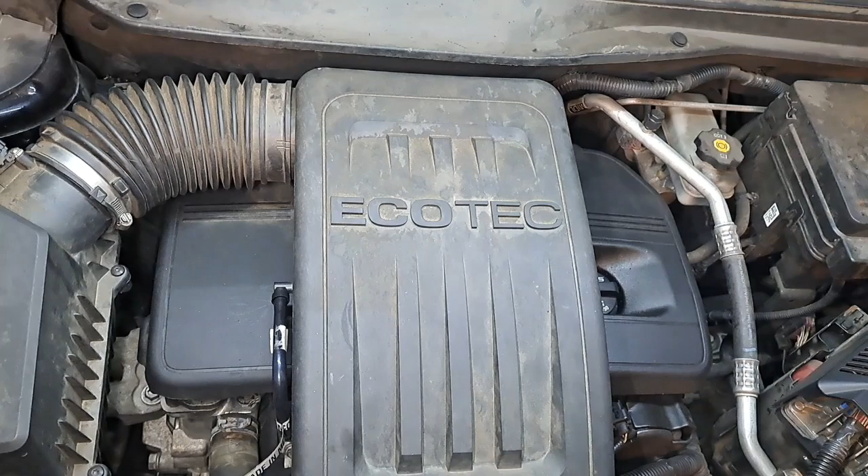All right, I don't want to talk too much on this because this is a warranty replacement. Well, you know how I am, I like to give good details. So, what's going on? This is the engine I did the head gasket on. It just had the burnt valve. It came back because the check engine light's on for P0014, and that's related to the exhaust actuator.

I replaced the oil control valve to see what happens, but pretty much what's going on, there's no movement, zero movement. And it wouldn't surprise me if what happened with this one, I think I reused the old gear, is going to be the same as what happened to the previous vehicle I just did with the timing chain components, which the actuator couldn't hold the preferred angle because the vanes inside of it were broken.

It was on the intake side, P0011. This is a P0014. So the vanes were broke, and it was incapable of sustaining 25 degrees. It would back out. That was just, for lack of a better word, interesting. It was interesting to find that. I pulled it apart and we saw that the vanes were broke. They're supposed to connect to the center portion or the hub, however you want to call it.

This one I think is the same thing, but we probably got all of them broken. But it does have a strange noise too when it starts up. So I just moved it in here. I'm gonna start it up and let you hear it because it had a slight rattle. Hopefully when I pull this down, do the replacement, pull this gear apart, we'll see the same thing, but with more vanes broken.

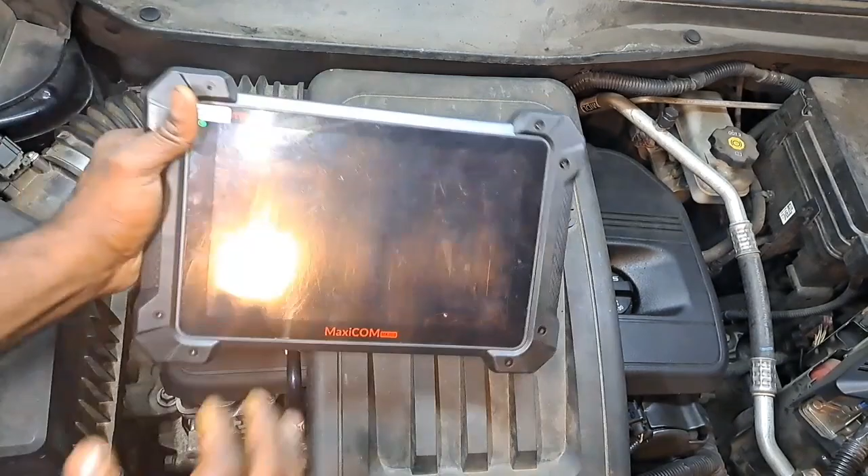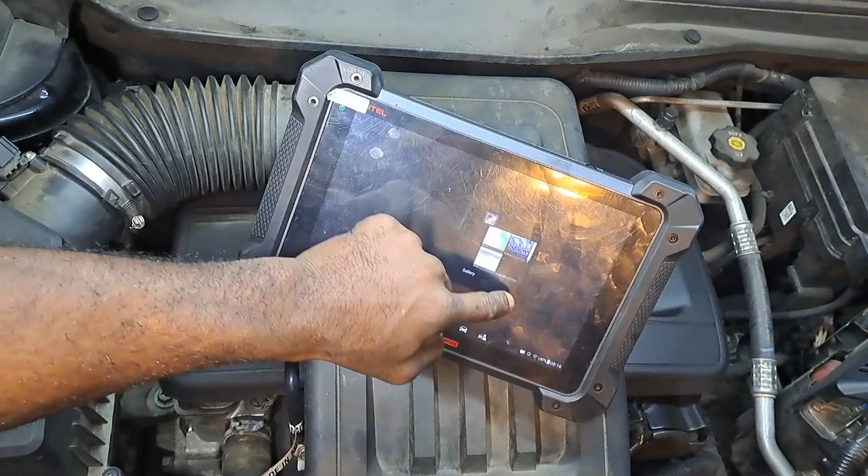We'll go from there, because I really only want to knock this out in less than 2 hours because I have other obligations. Oh, shoot. I hate having to do warranty. I got to do another warranty replacement tomorrow too. 5-hour replacement. Part failed 9 months later. Thanks Euro Parts. I don't know what to say. This year has been nothing but having to replace parts that I put on the previous year. I don't like it. You expect to put new stuff on and expect it to work, and it is not like that. It's like these companies are pushing you out of business. It feels like they're out to get you by having poor quality control. Let me show you the code that we got.

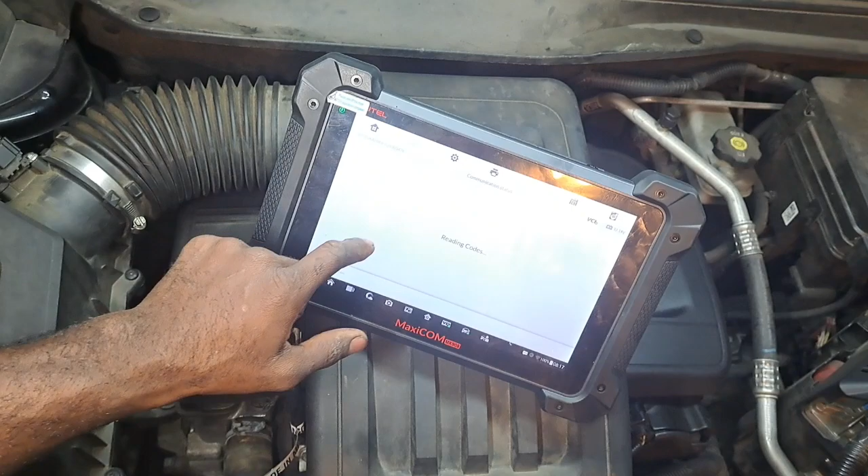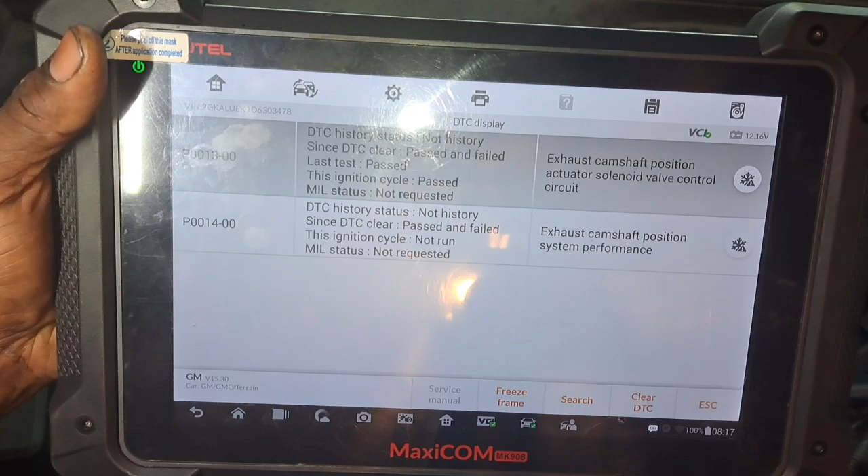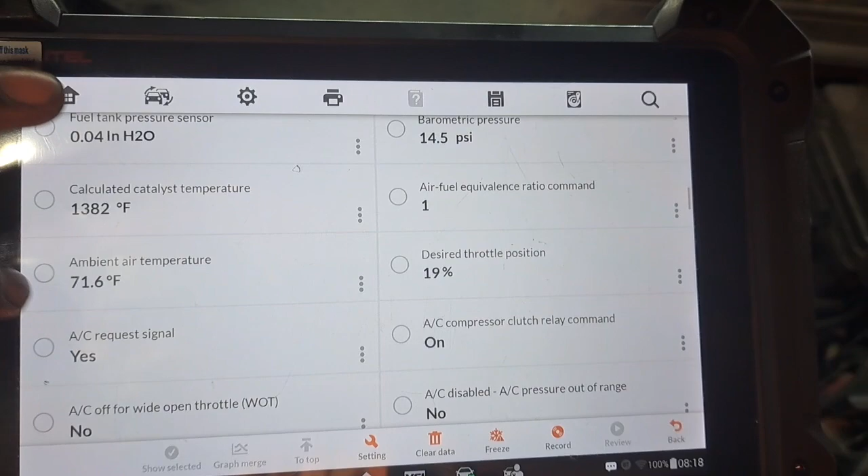Exhaust position actuator valve control circuit, P0014 and P0013. All right, that's what's here. I didn't see the P0013. I'm gonna clear those. Now, as a matter of fact, let me show you the freeze frame data for the P0014, because it should be a zero actual angle versus a commanded angle. Let me get that glare off the screen. All right, here's the freeze frame. Let's go down to the desired versus actual. It's down here somewhere. There we go. Here's our exhaust.

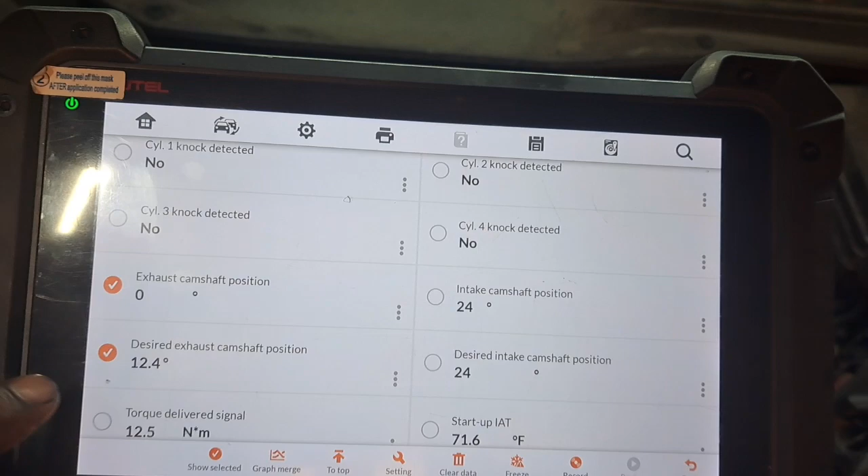Intake's working perfect. So logically, my intake should have been replaced. The one I didn't replace was the exhaust. My fault, but again, it worked before. Why bother replace it? That was my logic. It's just stuck at 0. So let me let you hear that little rattle it has, and just take my word for it, when I command this, it does nothing. It just stays at 0 degrees actual angle. All right, let you hear the rattle. Hopefully that'll be alleviated when I repair this.

And in all honesty, it sounds like a catalytic converter rattle. I put a new catalytic converter on here also. It's just shit, like it's going to shit. That's what it seems like. Put a new converter on here. Who knows? That probably took a crap.

But I know I left the old part on here, so let me go ahead and tear into it. I'm just gonna use a 10mm, zip everything off, get this valve cover off, get the plugs out, get to the state where I need to. And there's always condensation in here, always.

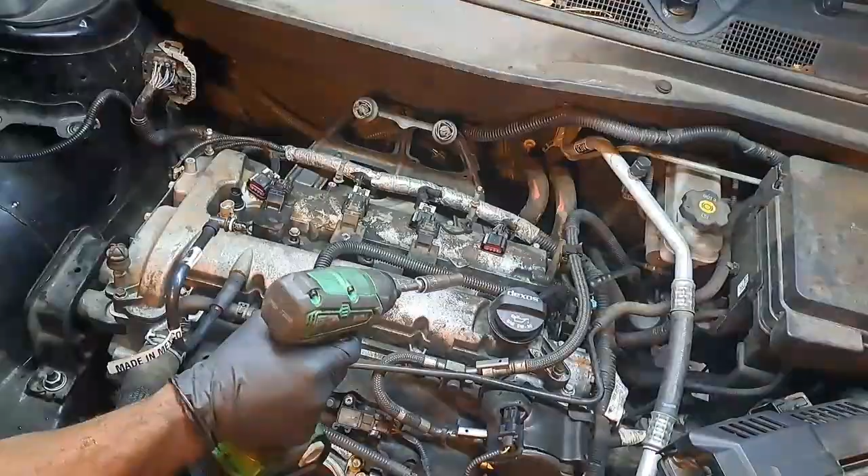So this is disappointing. The exhaust is brand new. This doesn't help the situation out really. It's new. Let me see if it's locked, if it's freed up, because if I recall properly, these shouldn't. Timing chain. Timing chain really shouldn't be this slack. No.

All right. So it's locked in place. I don't know specifically what's wrong with it. It's not loose, so it's not rattling, obviously. Only thing I can do is still just replace the actuator and see what happens, because I was definitely under the impression the one that I didn't replace was going to be failed, but that's still working. Oh gosh, this only reinforces the idea that parts that you buy ain't worth shit.

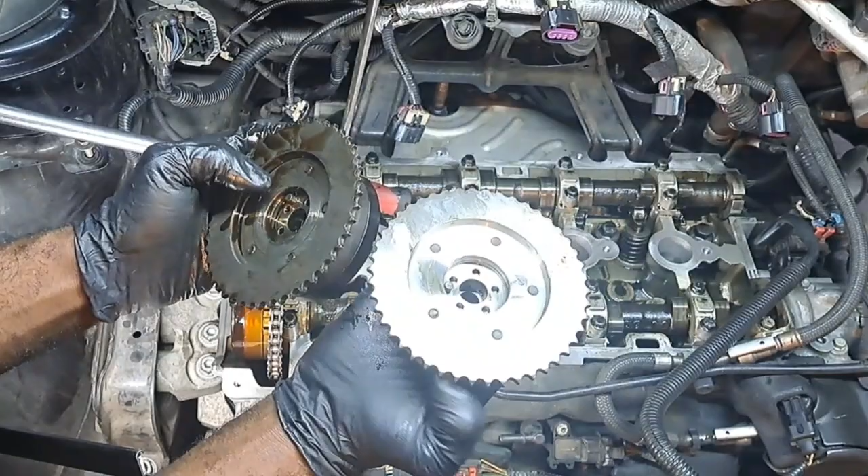These are different. Dang it. So the one that I have is a different color and they're oriented differently. Damn. I'm gonna have to go to the parts store and get a new one.

Let me see here. Show you. Line them up. They're different. I'm gonna have to run to the parts store and get a new one, because this ain't gonna work. Life, right? That's why I didn't use it, because when they brought me the kit, they sent me the wrong one. Let me put a mark on this one just to be on the safe side, just in case the timing happened to jump.

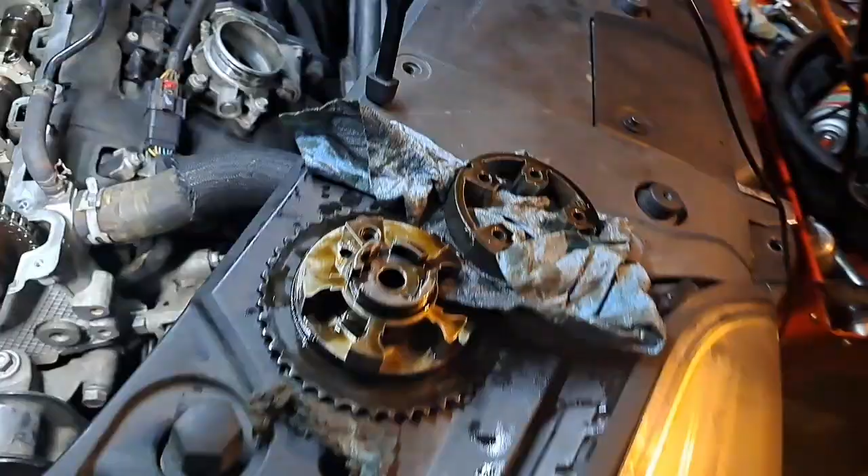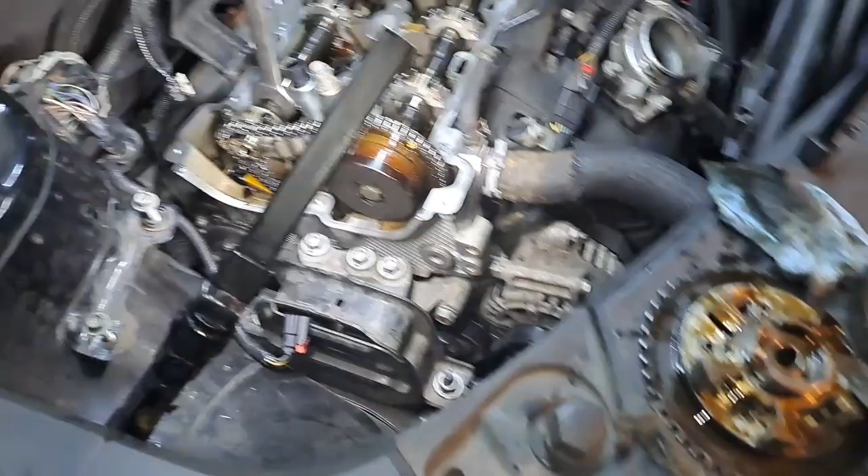All right, I guess this is bittersweet. I wound up taking this actuator apart, and the blades are intact to the hub here. They're not broken. The only thing else it could be is that it got stuck and it wouldn't do anything. But what I'm also going to do is pull the cap off and see if there's any type of blockage, and clean any obstruction if it is there, and that'll answer my question. Something's evidently causing it to not operate. And let me remind you, I did check the circuit, so I know for a fact the circuit works. I used the test light to command it on, and it's not actuating.

And that's fine inside the cap.

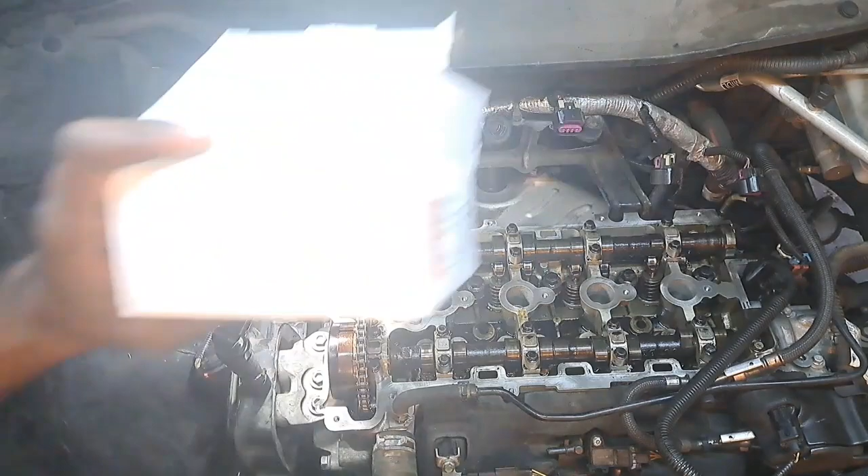So went to AutoZone, got a Dorman. Who cares about the part number, because all these parts are crap. We'll see what happens. I'm gonna get my tensioner installed, okay. Get that installed in reverse order. It's back together. Here goes nothing.

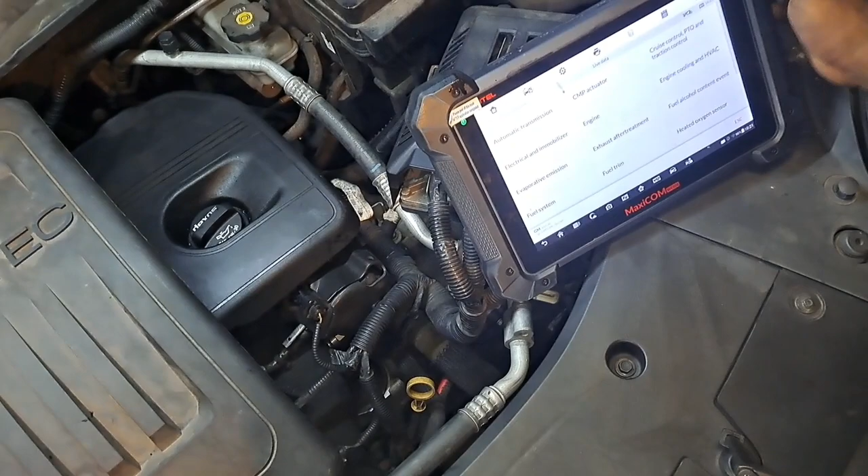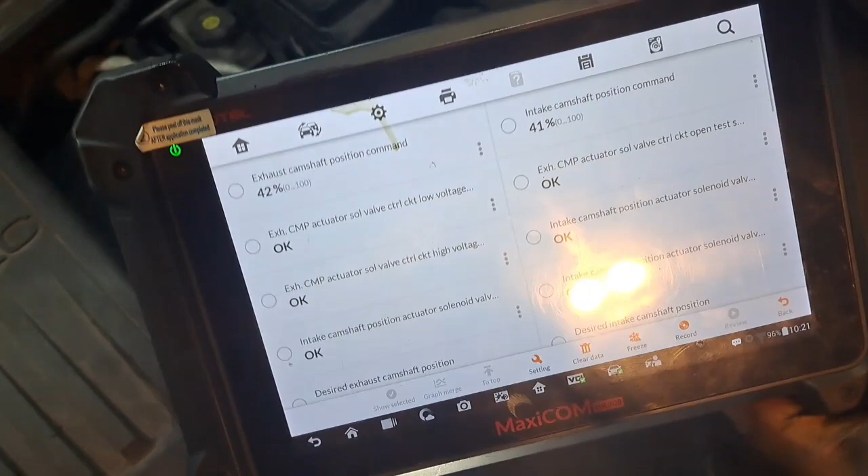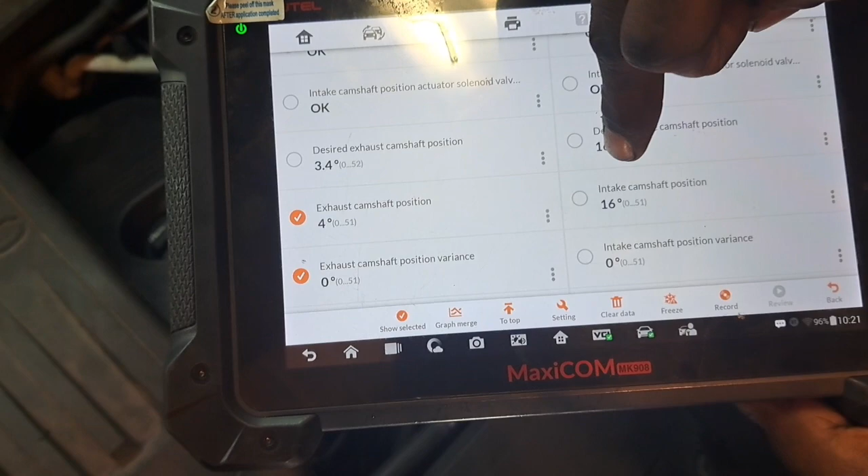All right, so that's great. We got some movement on the exhaust right here. That's awesome. That's the variance, which is no big deal. We want 0 variance. We have exhaust position, intake.

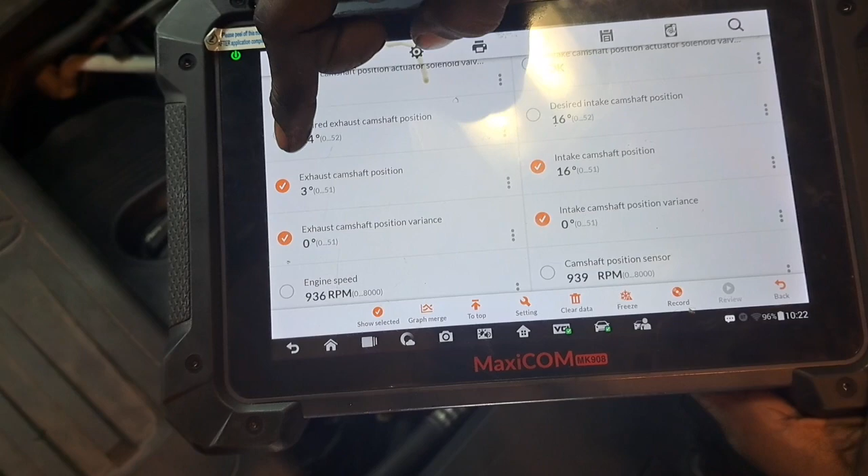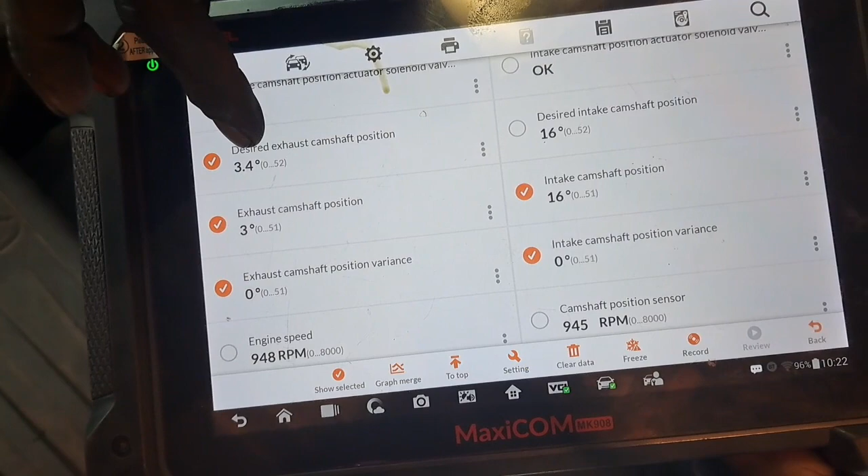Awesome. There's our problem. Bad new part. Prematurely failed. So we have a desired 3.4 degrees and we're actually at 3 degrees, 16 degrees on intake, and it's making 16 degrees. No variance, 0 degrees variance, it's perfect. Bad new parts.

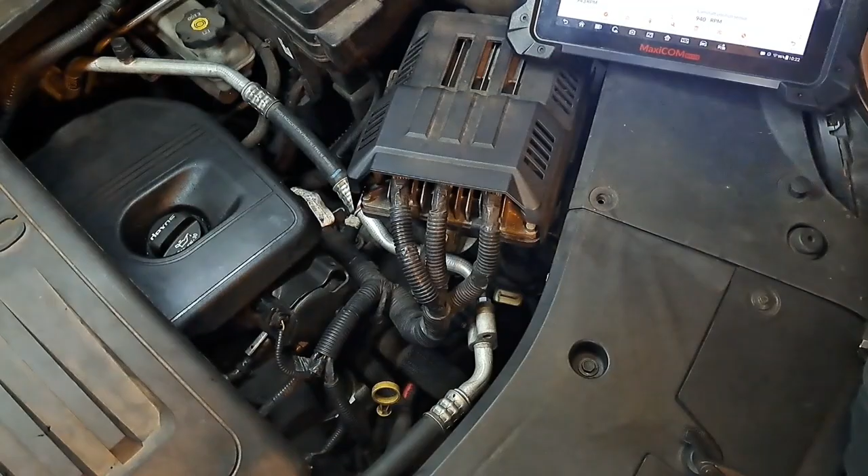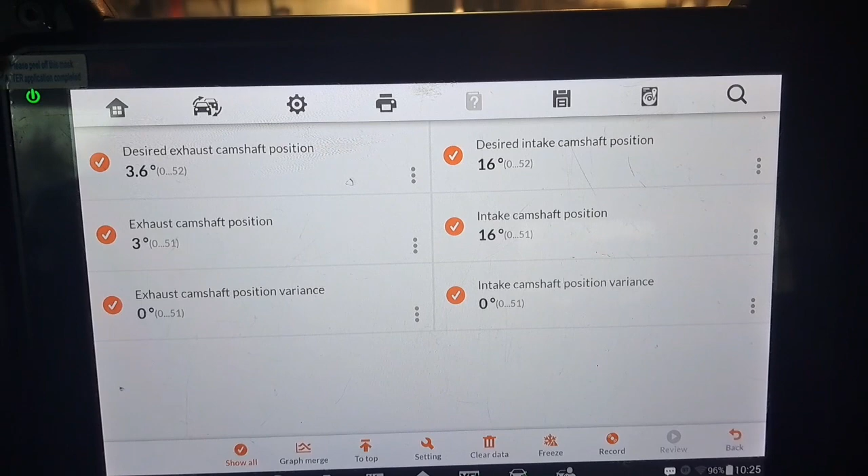I'm gonna take this on a test drive, but this is fixed, and this just reinforces the idea that these new parts that we're getting are literally gonna potentially put us out of business. I mean, this was free for her, but it's time for me. And potentially, even though she was easy going, people get upset when this stuff happens.

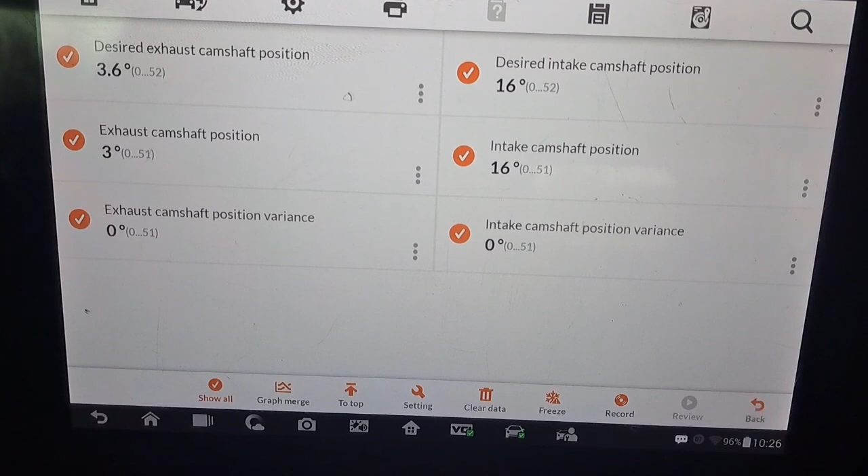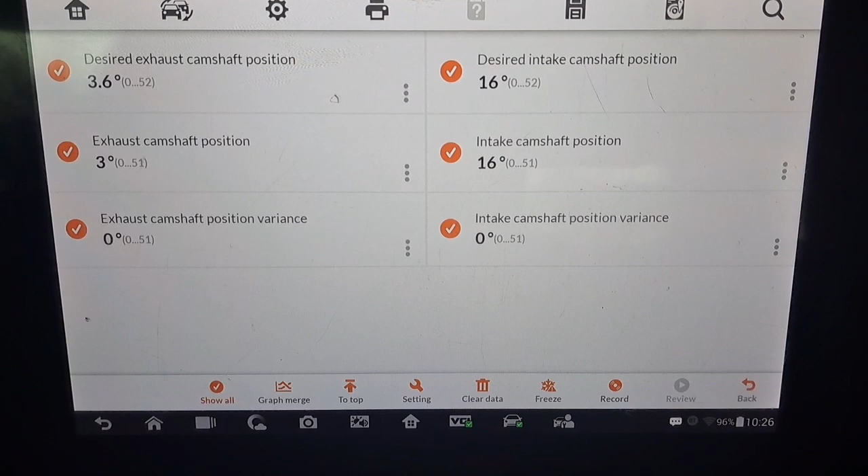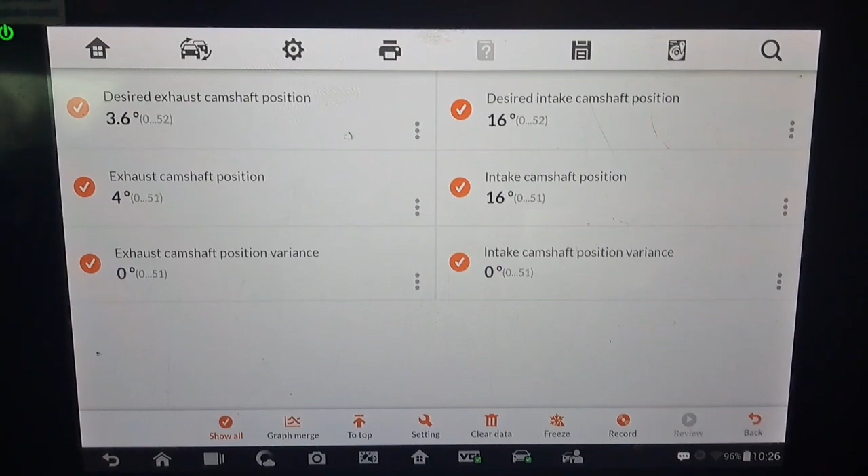Brand new part failed within, well, I take that back. I put that gear on there a year ago, but that still doesn't justify the fact that it doesn't work after a year. I mean, at least let the parts work 30,000 miles or so, at least. But these, they're failing within like 10,000 miles. I think this one probably lasted about 10 or 15 or so because it was like over a year. Man, I'm not going to complain because this has just been an ongoing dilemma.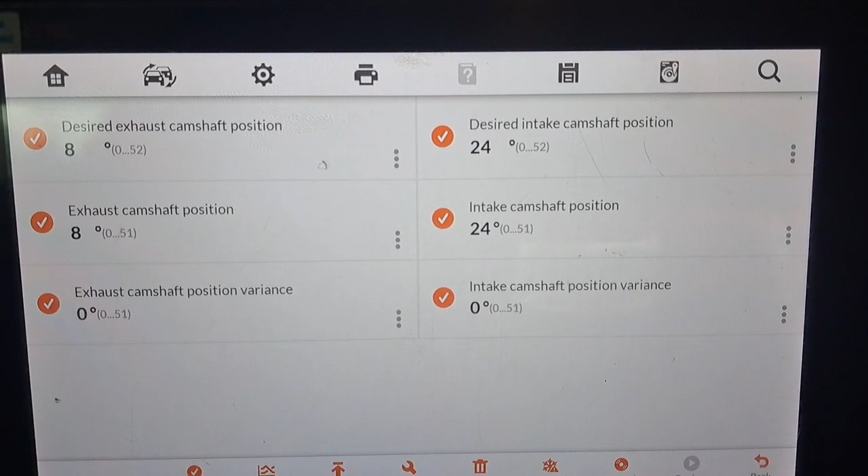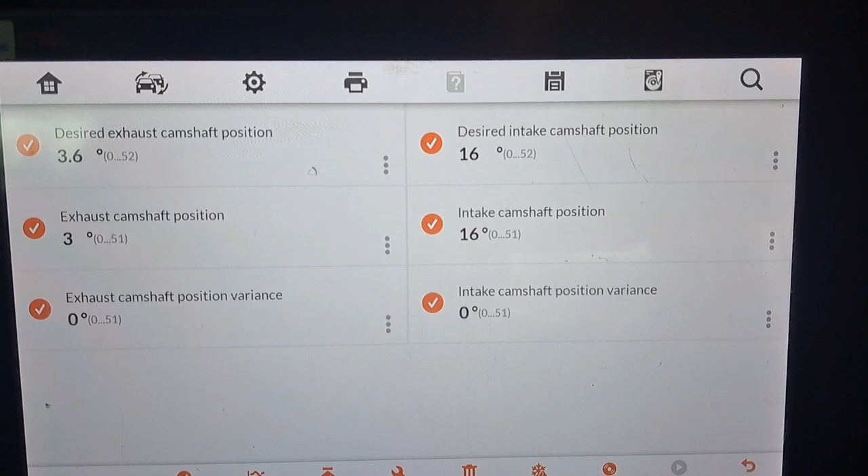Let me give it a little snap throttle. And it's working. Look at that. It desires 10, 12, and it's meeting those expectations. You know, the small variance is a normal thing because it has to move, but it could be better. But it's working. It's working like it's supposed to.

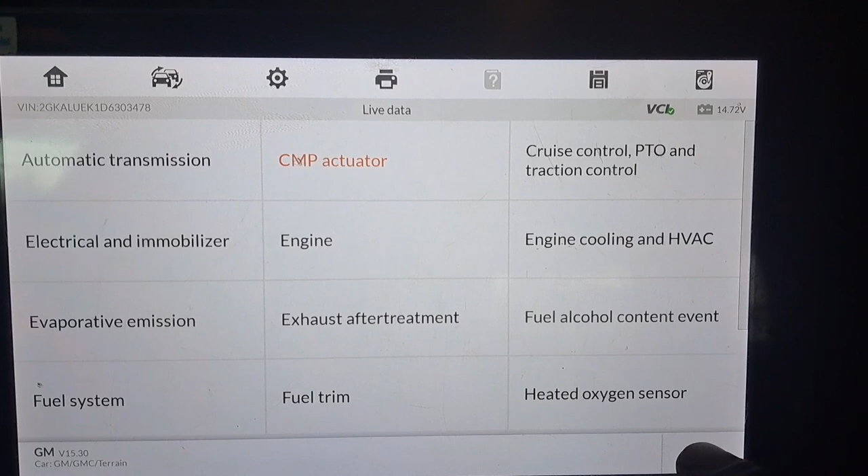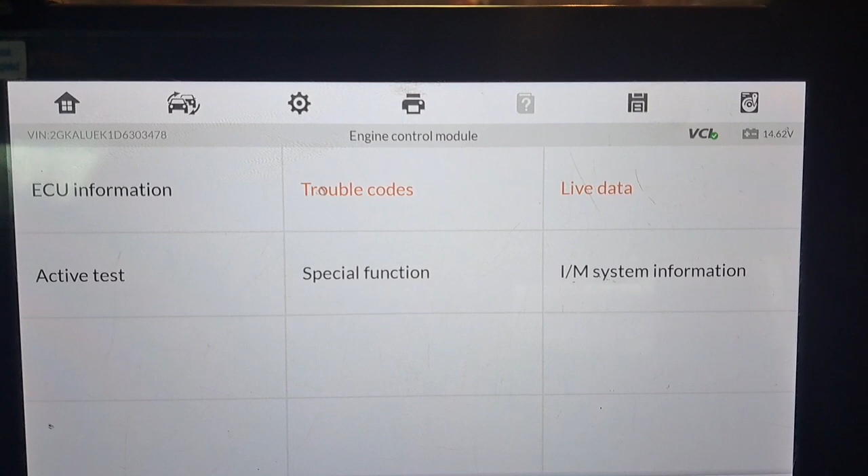So let me do one more thing. I can go and do an actuation test. Gosh, I'm just so aggravated. I could have been working on another car, and it ain't even worth filing a labor claim or anything, even if it was something that I got online. I got the better brand, but it's still the same thing, same concept. These parts should not be breaking.

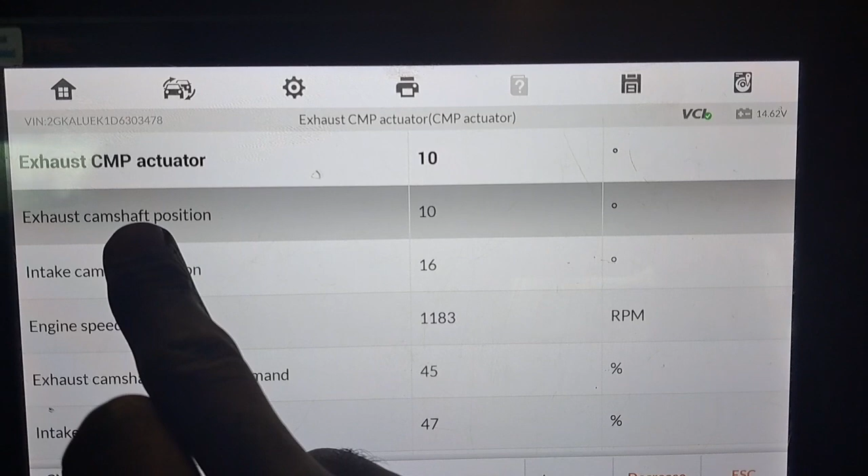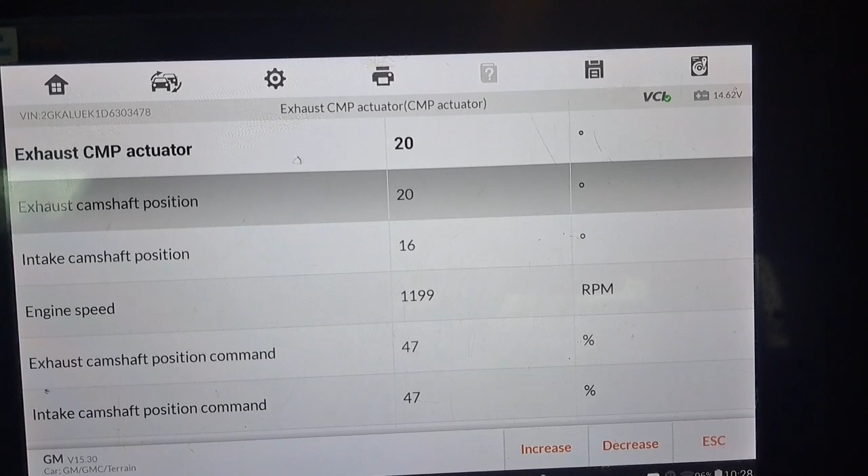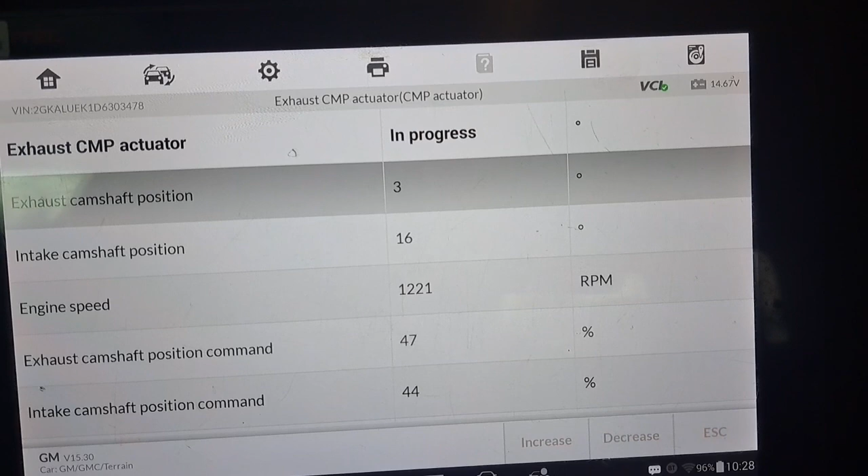The exhaust actuator, I should be able to command it to 25 and it'll meet those expectations. Here's our exhaust position. Here's basically me controlling the desired. I am the desired position, and at the bottom, highlighted, is the reflection of what it's capable of doing, which is completely reflective of the desired. 25 degrees, it matches. Take it down, 20, it's 20. No, it timed out, that's all.

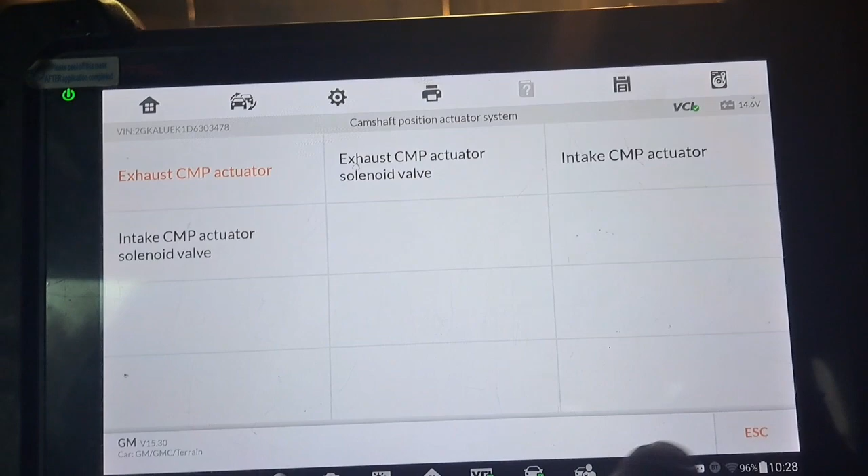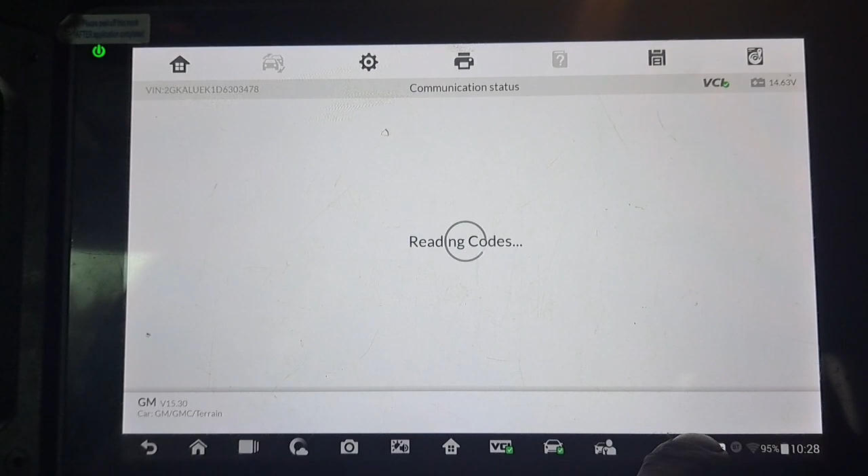But this works. I'm gonna take it on a test drive, make sure there's no check engine light codes. As a matter of fact, let me see if there's anything right now. I could probably put that old actuator back in there, but I'm not. I'm gonna leave the new one in there. Oh, that was because I didn't have those hooked up. Okay, that was my fault.

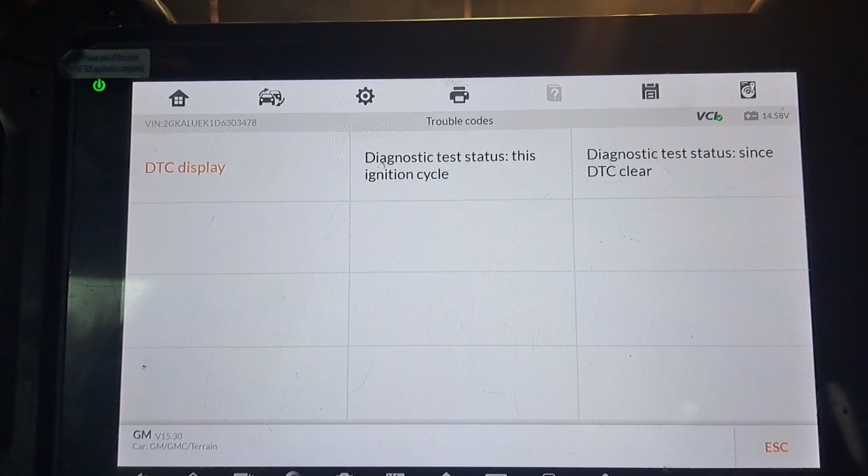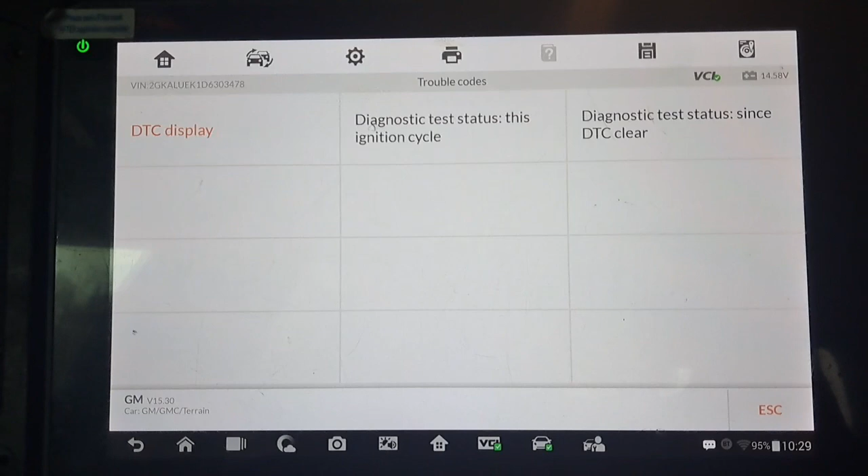Boy. Hey man, look, if anything ever happens, I'll definitely update in the description. But I got another warranty replacement job tomorrow, 5 hours on a BMW. Maybe I'll go live and complain about that. But this is what really makes me want to be like, I don't want to do this anymore.

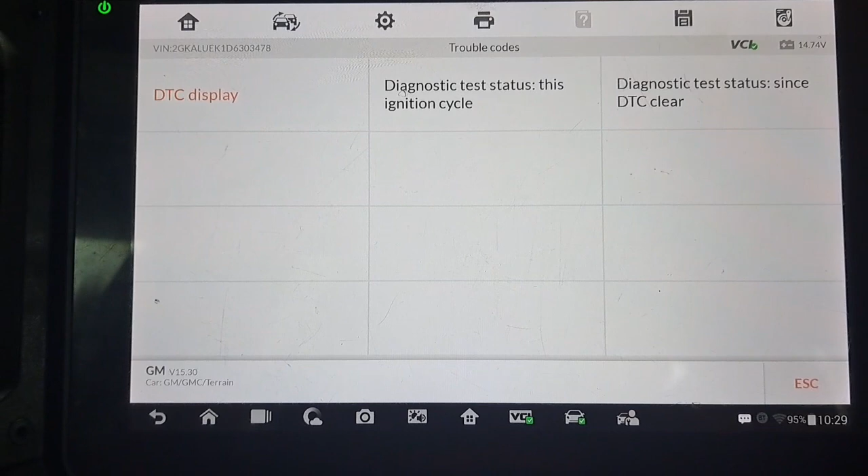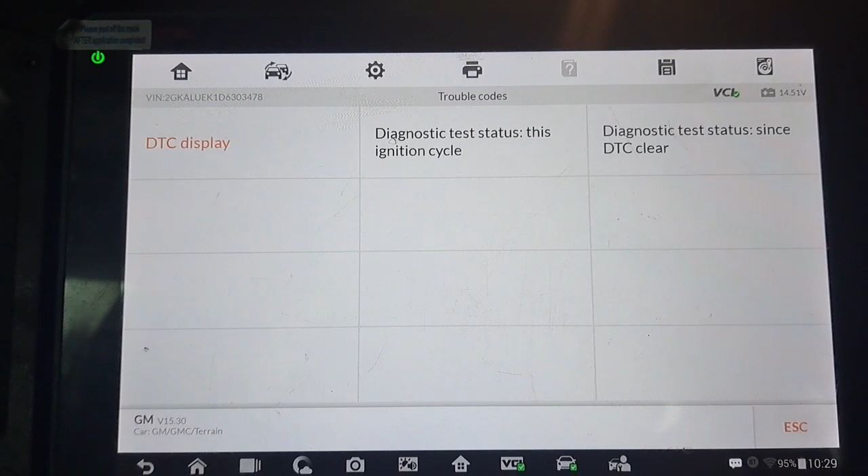I just want things to, when you're right, you should be rewarded for being right. You shouldn't be set back like this because it gives you a bad name. And I'm really big on reputation. I gotta preserve that. I don't care about the money like that. I just need to preserve my reputation, my credibility. But when things like this happen, it messes me up. It makes me take a lot of stuff that I do into consideration. It's like, do I really want to do this?

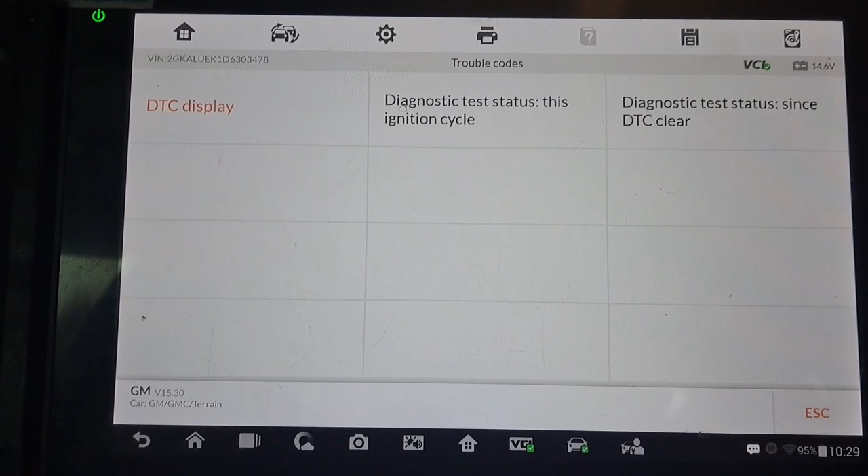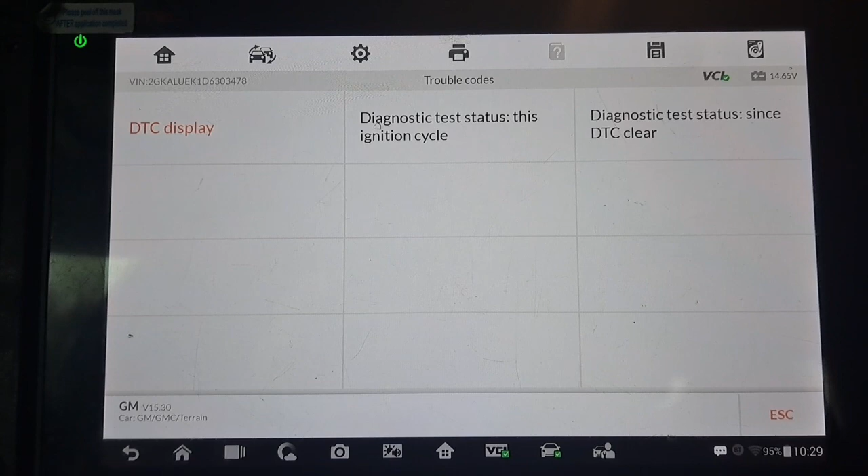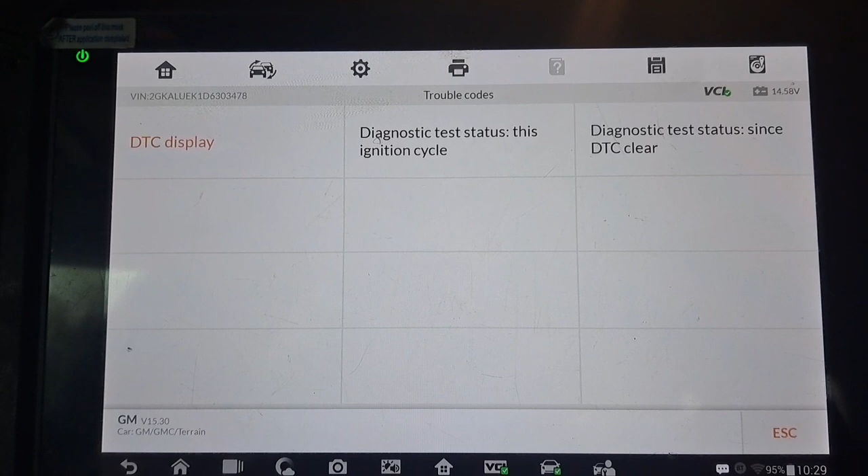And I understand why some people just really stick to dealer parts, but dealer parts still fail too. At least hopefully you have the best chance of things working out. But that's what aftermarket's for. Aftermarket's supposed to be able to make a name for themselves, and they're not living up to the expectation currently. Because if I spend $100,000 in a store and I gotta take back $10,000 worth of parts in a year, that's bad. That says something about quality control. If we can get it down to 0.25%, that'd be great.

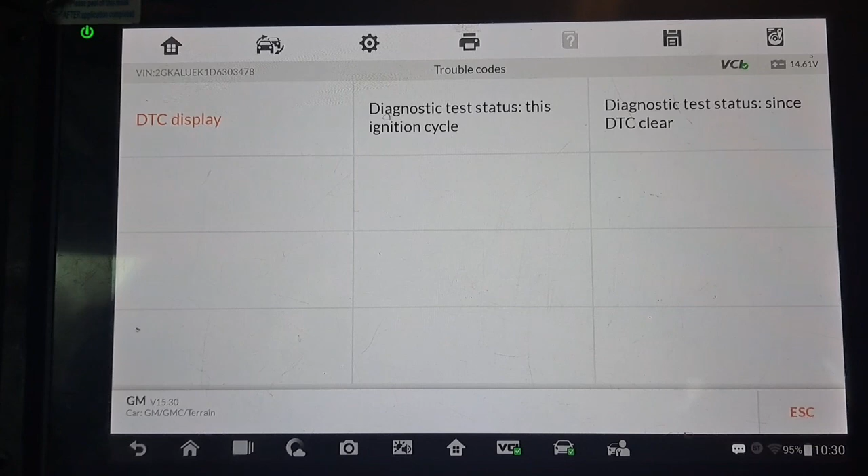But these things don't need to be failing like this, man. And the companies themselves are wasting money. Like, if a person like me has to file a labor claim, why in the world wouldn't they just keep that money and make a better quality part, or have better quality control?

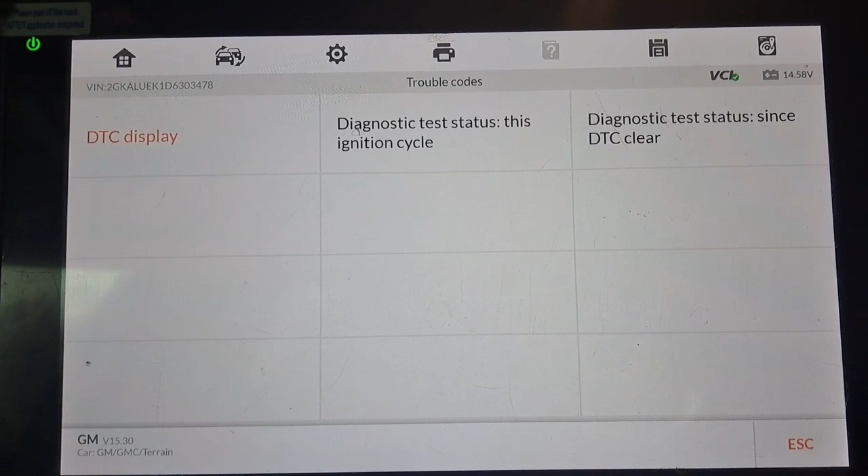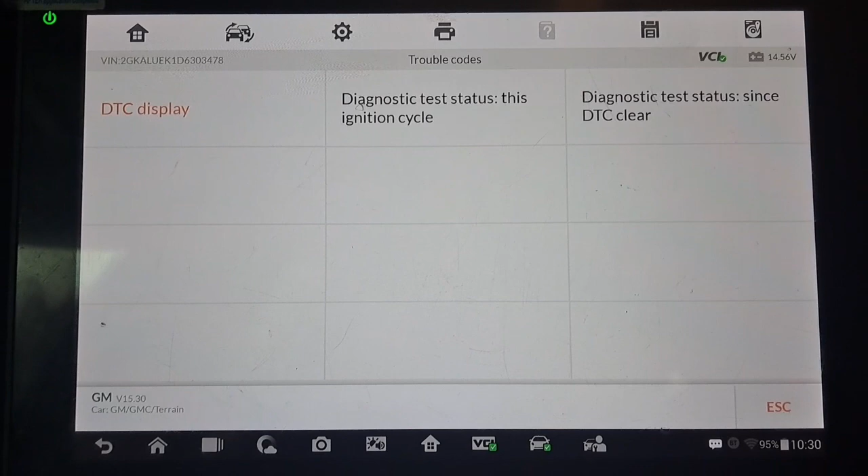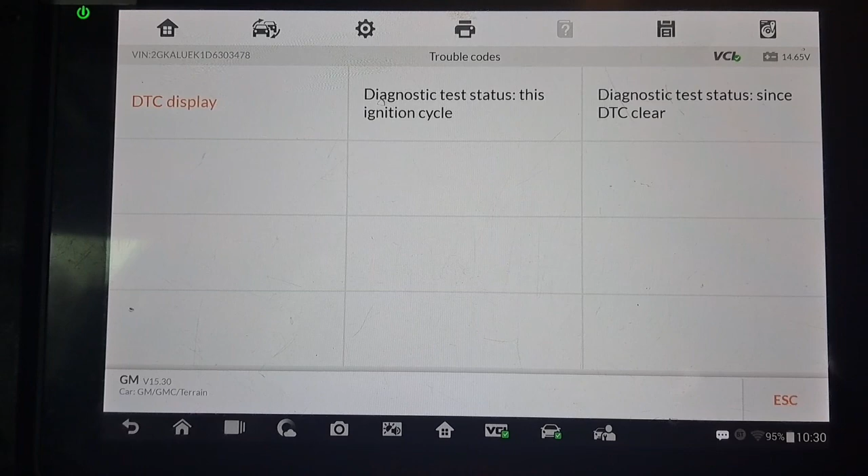But that's a trade-off when you have these large conglomerates. People can go to the dealership, and just because they're larger, they're justified in throwing these ridiculous, overwhelming numbers to the customer, and they'll pay for it. But let it be an independent person. Why do I gotta pay this much? They go to the dealer, they'll acquiesce. They will. But anyway, if anything happens, I'll definitely update.